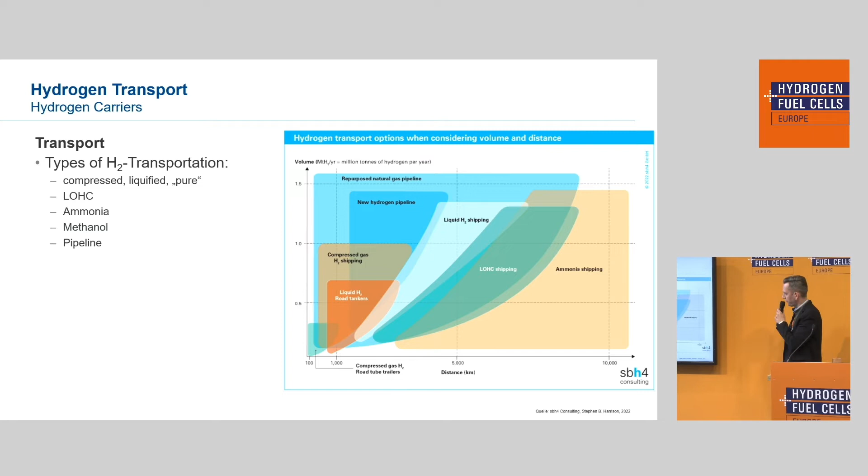And because the title of this presentation is Hydrogen Custody Transfer, it's very important to always know how much hydrogen or how much of the derivative we will have on this specific carrier, for example, the ammonia or the methanol or in the pipeline. And it's always important to know how much hydrogen we have. And so we'll need to have measurements installed and custody transfer.

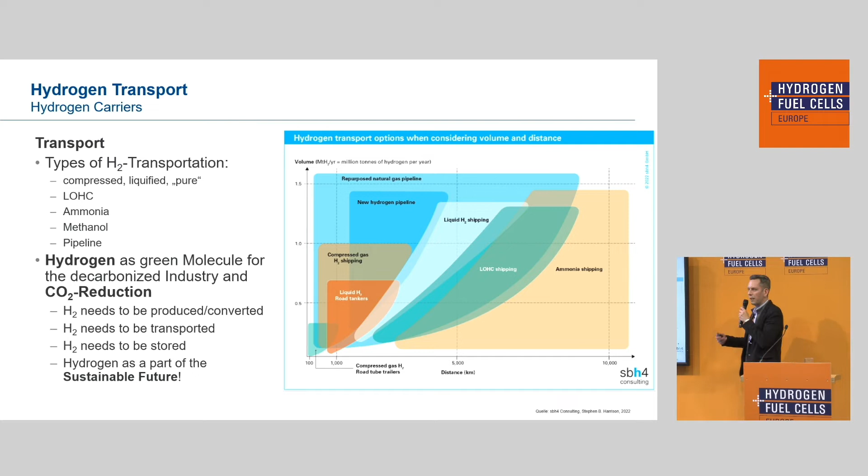Hydrogen as a green molecule is also a part of the CO2 reduction in the future. We always have to keep in mind that hydrogen needs to be produced or converted. It needs to be stored and transported. And we need to have this in mind because all of these different transport points need to have a measurement in there, and we need to measure hydrogen in any space.

So just Emerson at a glance, what are we doing? Thanks for the introduction that I just had. So right now we're about 83,500 employees globally. We have 200 production sites, just for your knowledge, and we have 21,000 active patents right now in the world. And we're also looking at how we can do our part for a greener and sustainable future.

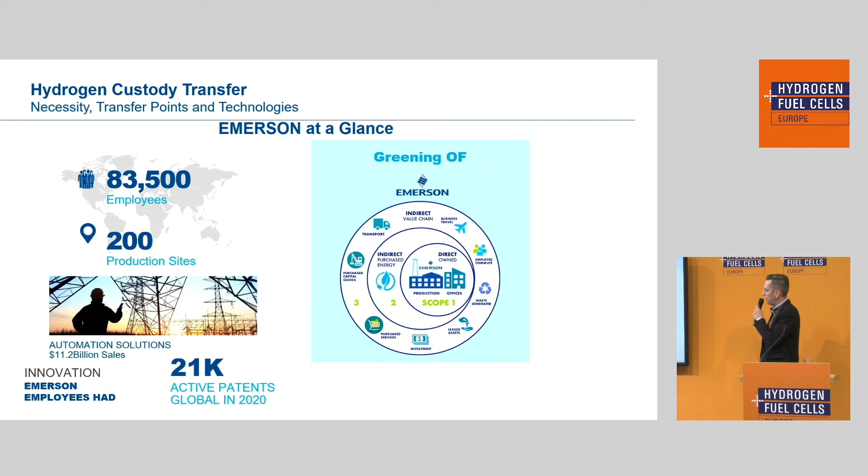So we have greening of. This is what we do. We try to have an improved CO2 footprint. We need to lower the energy that we consume. Greening with: we are of course partnering with different institutions and different partners to participate in the hydrogen market. And greening by: this is what we can do with our solutions for the future in the hydrogen market.

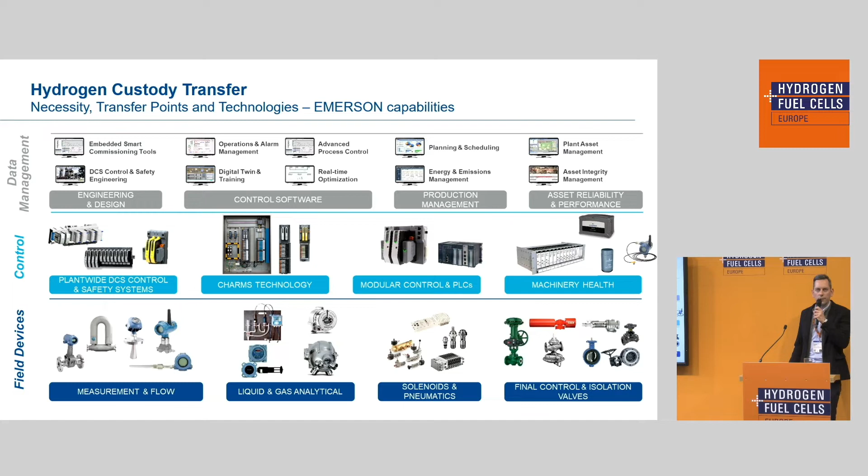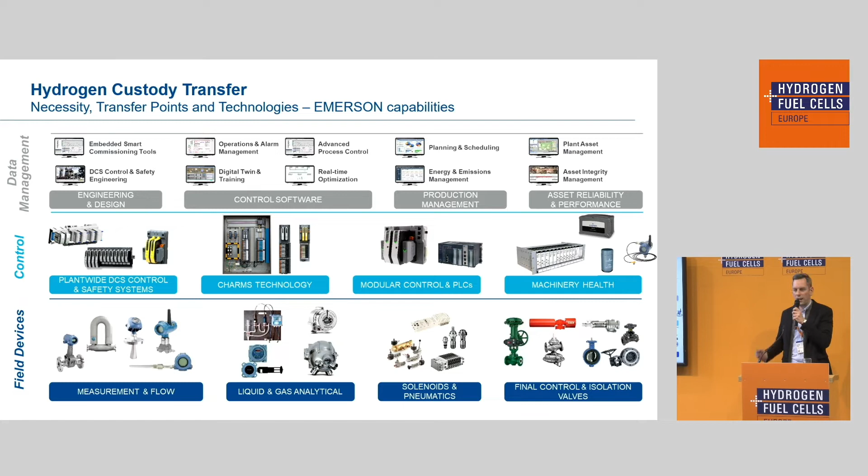So if we look at our complete portfolio, this is what we can offer, not only field devices and measurement devices, also control devices and of course the data management. But we are going to have a look today at this area down here, which is very important for the hydrogen custody transfer.

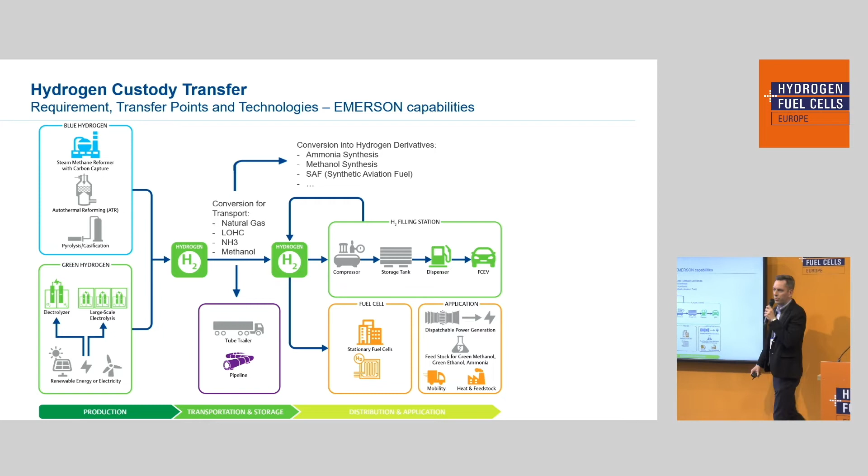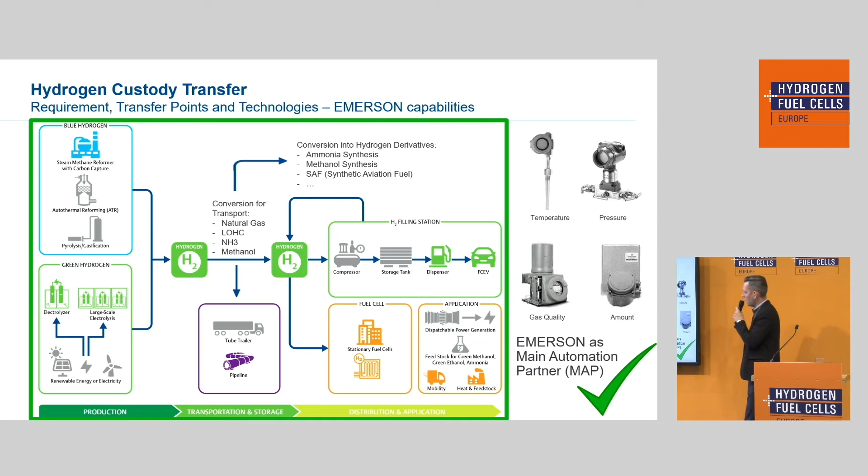At any of these spots where you see these little arrows, or where this is converted or transported to another place or into another derivative, at any point, we need to know how much hydrogen or how much of the derivative we are transporting from one point to another. And this is why the custody transfer and also the H2 gas analysis is so important. And one thing that's very important is that Emerson can provide all of these measurement technologies, including the gas quality, the amount, which is done by a Coriolis meter, or the pressure or the temperature at any spot.

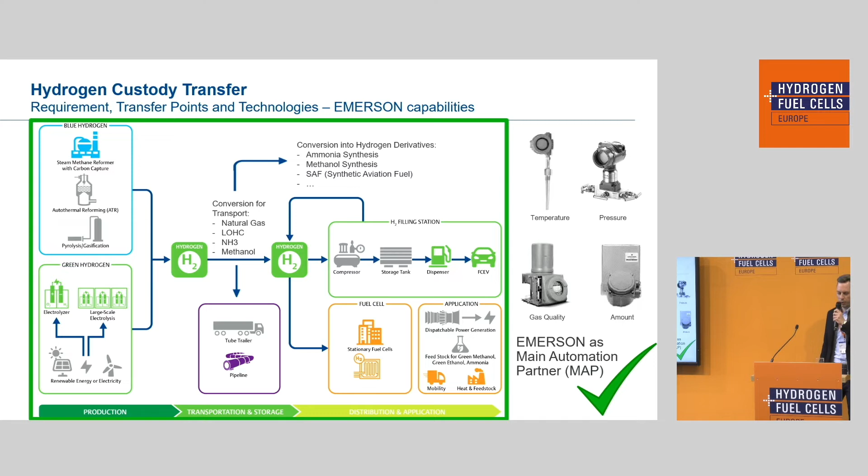And I just want to show one of the examples if we look at the hydrogen custody transfer. And this would be, for example, our HPC platform, which means hydrogen pressure Coriolis. And this is nothing else than a Coriolis device, and it's suited and improved for hydrogen measurement.

So, for example, safety for hydrogen is a very important topic. We have the SIL approvals, the built-in rupture disk, and the ASME piping codes. In terms of accuracy, if we want to know how much hydrogen or one of its derivatives is going from one space to another, we need to know this value exactly, which means we have a high gas flow accuracy. We are working on and have already installed some of the OIML approvals.

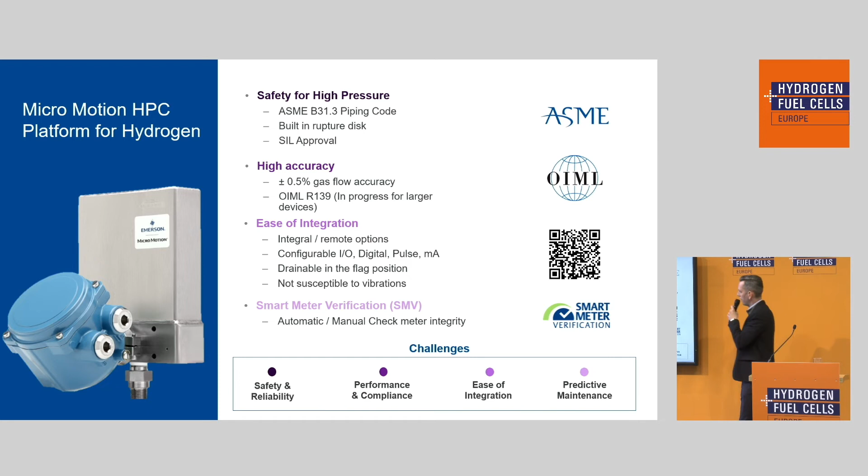It's easy to install and integrate this kind of measurement in your plant or in your process, because we have the remote options, configurable IOs, digital inputs and outputs. And what's of course very important for future installations is the smart meter verification, which means we can check the health of the device and of the asset from a remote control center or in place where the measurement is installed, just to know the health status of this device. So this is just one example of our portfolio and how we can measure hydrogen correctly.

If we look at the other part of the presentation, the gas analysis applications, we have one device, and I invite everyone that is here in the technical forum. Sadly, the people watching digitally cannot join us here in booth number 54. We have one of these devices there, and we can also have discussions and questions directly beside this device.

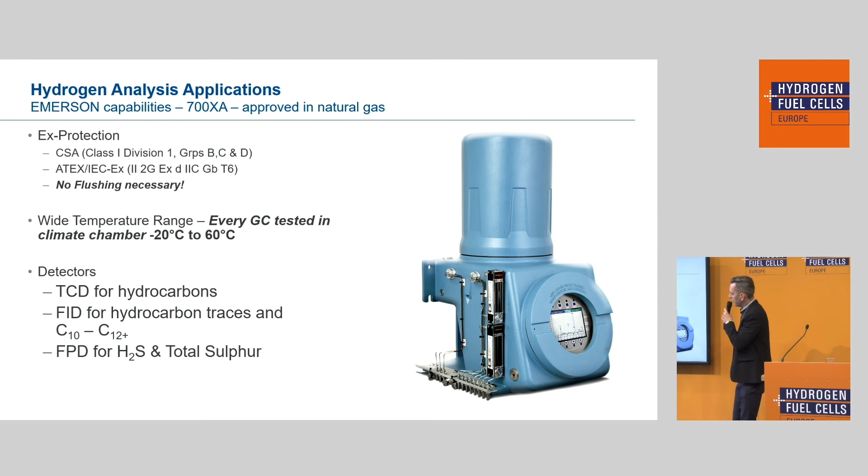This is our gas chromatograph, which has, of course, several Ex protections for safety. Very interesting, every one of these gas chromatographs is tested in a climate chamber just to be sure that temperature doesn't influence the correct measurement of this device. We have several detectors here for hydrocarbons, for traces, and C10 to C12 plus. We have, of course, the flame photometric detection for H2S and sulfur.

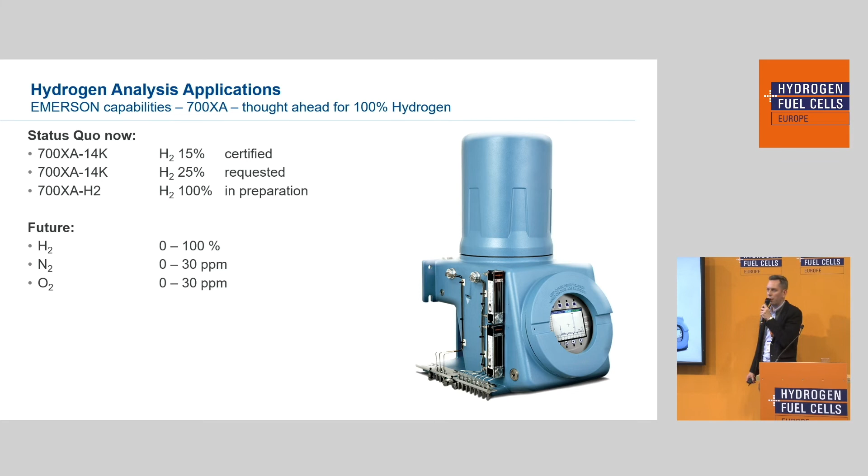And this device originally comes from the natural gas market, and we are improving it and developing it towards the new hydrogen future, which means we already have hydrogen up to 15% certified. We're working now on the 25% hydrogen concentration. And of course, in the future, this device will be available with 100% hydrogen. In the future, we have 0 to 100% hydrogen, 0 to 30 ppm N2, and O2 also 0 to 30 ppm.

So this will be my last slide. I think yes, I'm good on time.

So just for a quick wrap up here, Emerson can support the hydrogen value chain: custody transfer, analysis, valves, automation, software, all the different parts of the automation solutions. And due to our deep value chain, because we have all these products in-house, we can deliver targeted project management and help our customers to be on time and on budget with their projects. And if you have one main automation partner, which is Emerson, you have one single point of contact, and this enables shorter time to market.

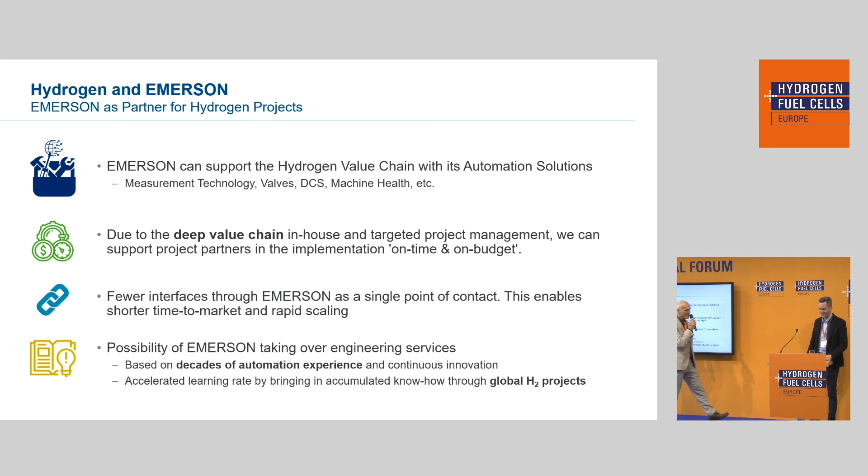Thanks a lot for this very interesting speech, Tassilo. And now we're going to the next presentation. We are just in time, skipping to the next speech. And we stay international. Thanks a lot. Thank you. We skip to the next country from all over the world.